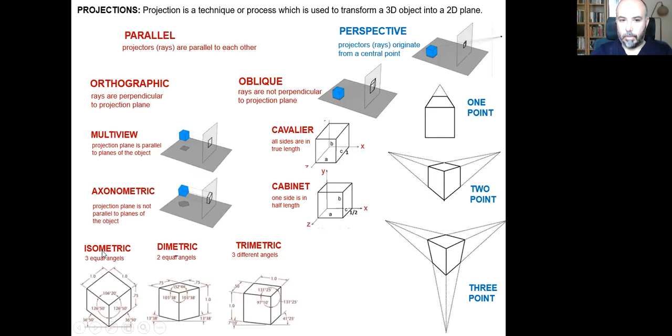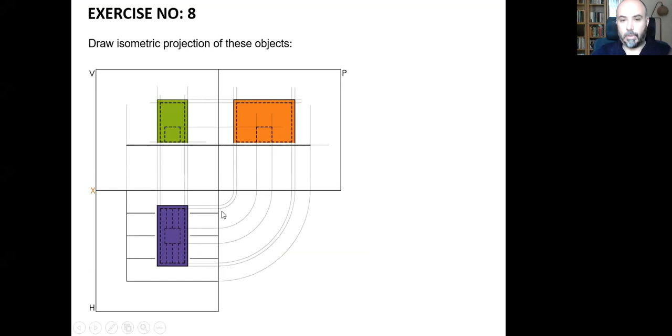Let's learn how to draw an isometric projection. And we can do this as our eighth exercise. We are supposed to draw the isometric projection of these objects that we drew the multi-view projection of in our seventh exercise.

There are some certain rules in order to draw the isometric projection. We are going to learn them step by step. But we should know that if we want to create an isometric projection of an object, we need the upper view of that object first. We are going to do the isometric projection by using the upper view of that object.

So we take the upper view here, and for this exercise, we can use another A4 paper, and we can divide this A4 paper into four rectangles, four areas. But please use your vertical line to divide this paper. But you should position your vertical line according to these distances in millimeter. So from the left edge of your paper, you can measure 11 centimeters to draw a vertical line so that you will be able to divide this area into two columns.

And by finding the middle part of this height here, you can draw a horizontal line so that you will have four areas on this paper. And we are going to use this part of the paper for this exercise, for our eighth exercise. And we are going to start by drawing the upper view in a different position with different angles here. And we can start by this point here.

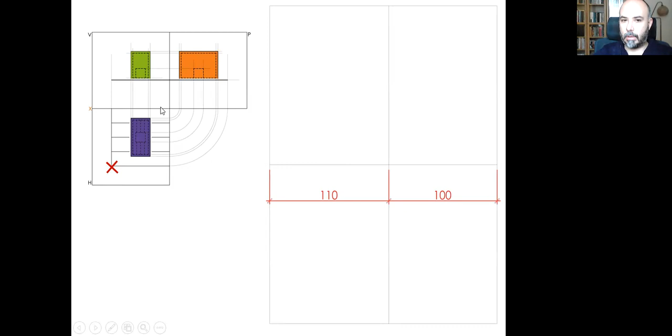As you can remember, this is the upper view of our square horizontal plane. And on top of it, there is this rectangular prism. So we can start by finding a spot on this area. We can measure 5.5 centimeters and find this middle point of this line and go up for 3 centimeters. And this point here will indicate the corner point of our horizontal plane here.

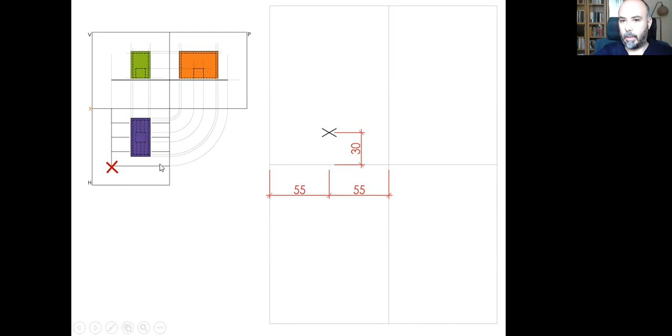And after that, we need to draw this line here for 6 centimeters, this line of this plane by using our continuous lines. However, we need to go for barely visible thin and gray lines because we are creating a base for our isometric projection by using these guiding lines.

By using this point that we just indicated, we need to start from this point and go for 60 millimeters by using a 30-degree angle here. So here you can do it like this if you want. You can use your set square and you can position it like this by using this 30-degree angle here. As you can remember, you get two angles, 30-degree and 60-degree. And this is the part where your numbers are.

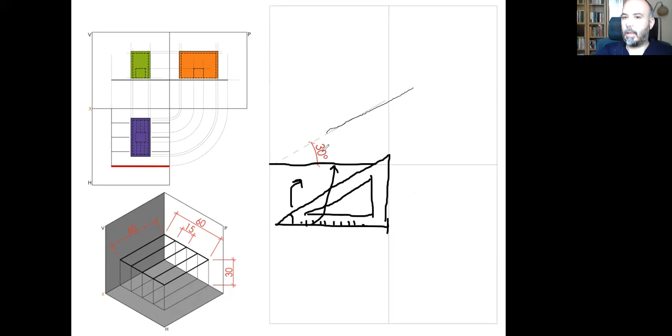So you can position it over your T-square by overlapping this side here on this line so that you can create a thin line going upwards like this for some length. It doesn't matter right now.

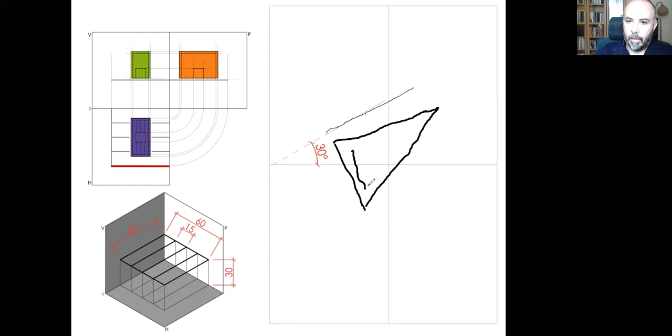After that, you can change the position of your set square and you can turn it over like this so that you will have the numbers on this side and you will be able to measure 60 millimeters over here, and that will be your first line. So you can use this side to measure 60 millimeters, and that will be your line.

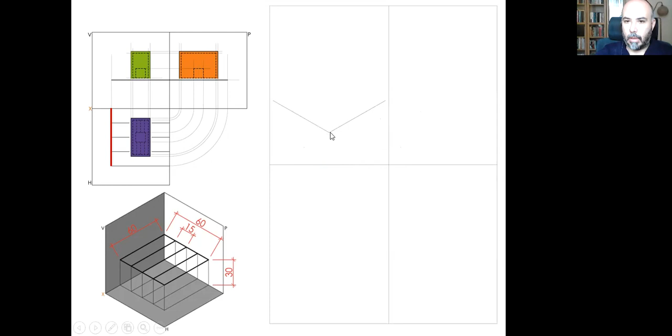And after that, we need to draw this line in a similar way. We can start from this point here, that one here, and go for 60 millimeters again in this angle for 30 degrees. And after that, we need to complete the square by using parallel lines. Each one is 60 millimeters in its true size. So this is our square plane here. I just get a little bit closer so we will be able to see it in a better way.

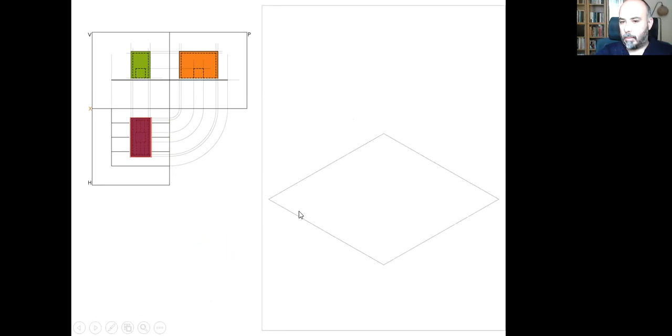After that, we need to draw the rest of the upper view. We can draw this prism's upper view, the purple surface. So I need these lengths here. This is the 4 centimeter length. This is the 2 centimeter width, and it is positioned with 1 centimeter gap and 2 centimeter gap here.

So I just need to measure 2 centimeters up here, find this spot, and then I need to measure 1 more centimeter towards this direction, but I need to go parallel to this line.

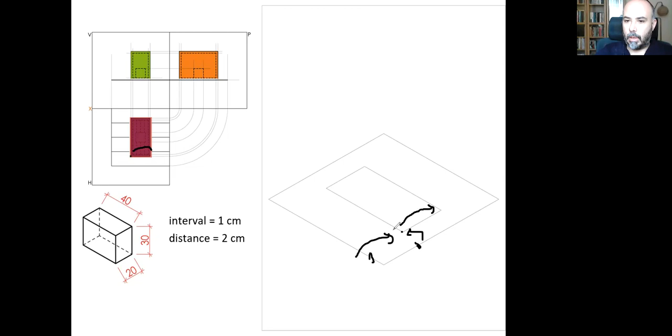It needs to be parallel to this line. I find this corner, and it is this corner of this rectangle that I find. After that, I can measure for 2 centimeters in this direction and create this line here, and then I can measure for 4 centimeters up here to create this line and close the rectangle by using thin and gray lines. And that is the upper view of this prism.

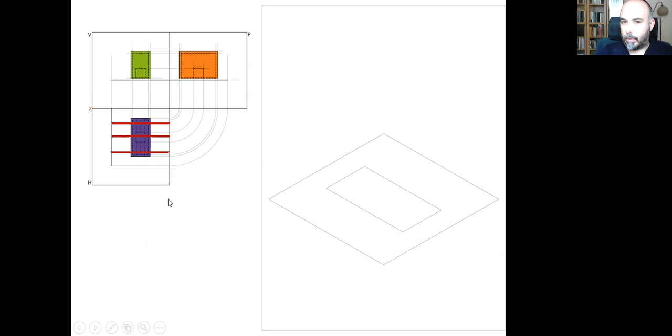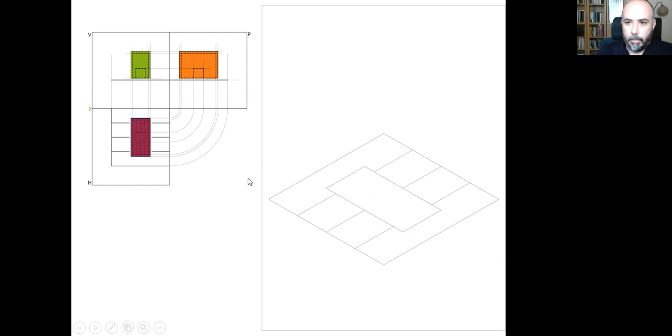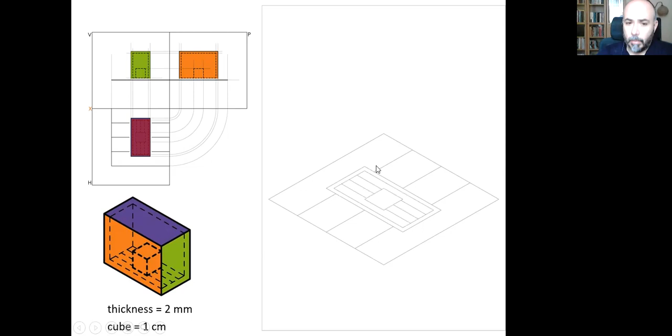After that, I can draw these profile projecting lines. I just need to remember the length and their position again. But this time, since I am creating a guidance for myself, I don't need to leave the gap anymore because this is not the final drawing. And similarly, I need to draw what is inside the box by remembering the length and other properties. But I don't need to do dashed lines. I am still using thin and gray guiding lines for myself.

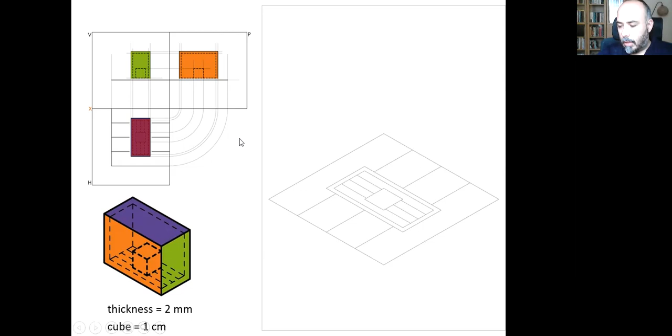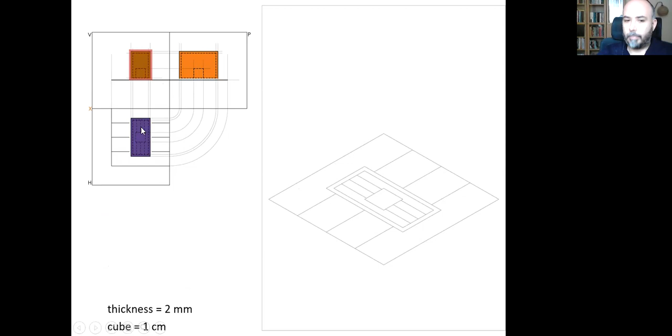And once I finished everything with the upper view, that means that I completed my first step and I can go further for the second step of the application. For this step, I need heights. And this is the drawing that I can use to remember. I need to remember that the height of this prism is 3 centimeters, and by using again gray and thin lines, I need to draw 3 centimeter vertical lines that originate from every corner of this rectangle, and draw another rectangle for the prism here.

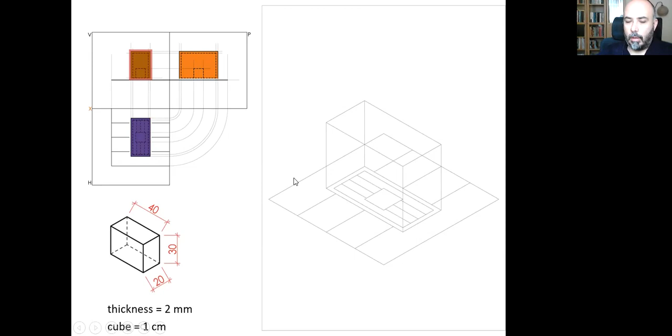And for the inside of the cube, first I need to remember that there is a 2 millimeter thick base surface. So I need to elevate all these lines for 2 millimeters because this is the actual position of these lines. They are standing on the bottom surface of this box. And after that, I need to draw the height of these inner edges, which is 2 millimeter, 2 millimeter, 4 millimeters less than 3 centimeters. That means their height is 26 millimeters. And this is the 2 millimeter thick edges of this cube.

After that, I can draw the height of the cube. That is 1 centimeter. And horizontal projecting lines at the bottom of the box here. And this means that I completed my second step, which is the heights. After that, I can move on to my third step and my final step.

This time, I need to use my middle thickness, middle darkness lines to emphasize the edges of the lines that I am seeing when I am looking to the system in this direction here. I need to use continuous lines and middle thickness, middle darkness lines, which means that I am going to redraw by using these guiding lines here. But I need to consider that these are the lines that I am seeing, and the rest of the lines are being blocked by the prism. So I am emphasizing the edges of the prism.

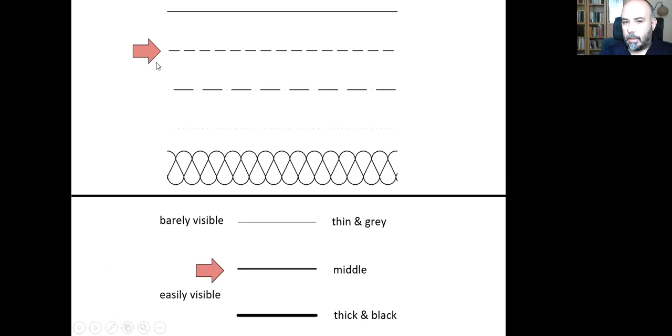And again, for the things that are being blocked by the prism's sides, I am using the dashed lines, as I already did. These dashed lines with middle thickness, middle darkness lines, I need to avoid this confusion here. I am using middle thickness, middle darkness, but dashed lines, and that is all. And here, this is important. If you want, you can indicate these lines as well, since they are being blocked by the prism.

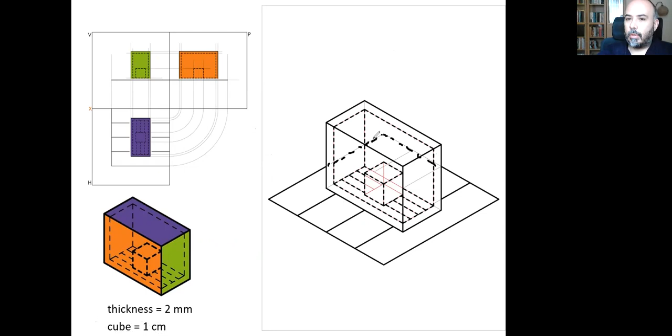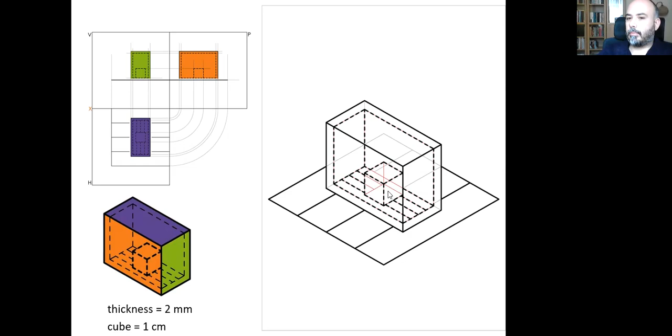I need to do the dashed lines as well, but I prefer not to indicate them because it will be too much information and there will be confusion for people who are going to see this drawing. They will be confused. They will not be able to understand what's going on if I give too much information. It won't be wrong technically, but you may cause confusion by giving too much information. So this is my preference, not to give them. I decide to give just one blocked object and not go further 2 times. And after that, I can do the coloring.

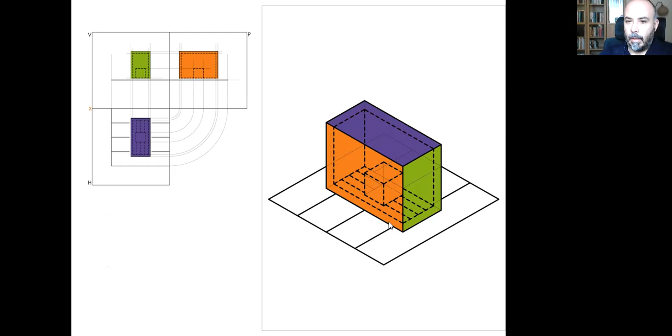And please do not erase your guiding lines. They need to stay put like this. That is the reason why we are doing them barely visible. You don't need to erase them. They are your guiding lines and they need to be put like this. And this is the isometric projection and how it is done.